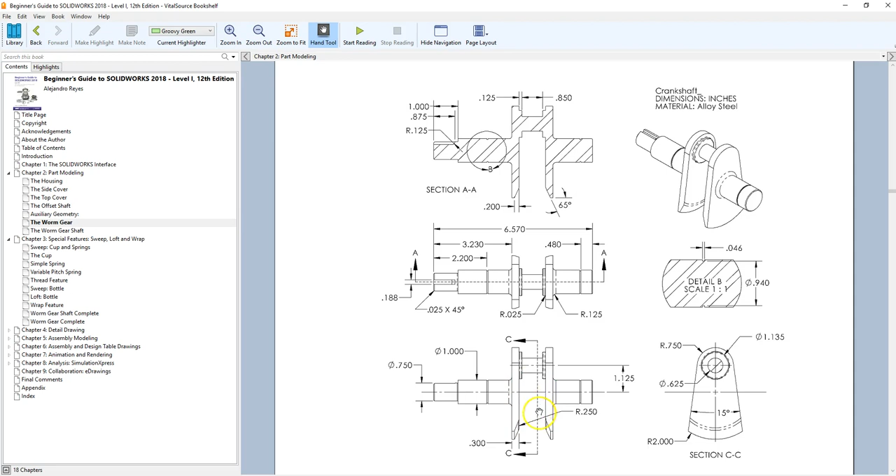So we're going to create an extruded boss, and I'm going to do it on the right plane. This is my origin, so this top part is actually going to be above it. I'll go ahead and line up a circle and put a dimension on it.

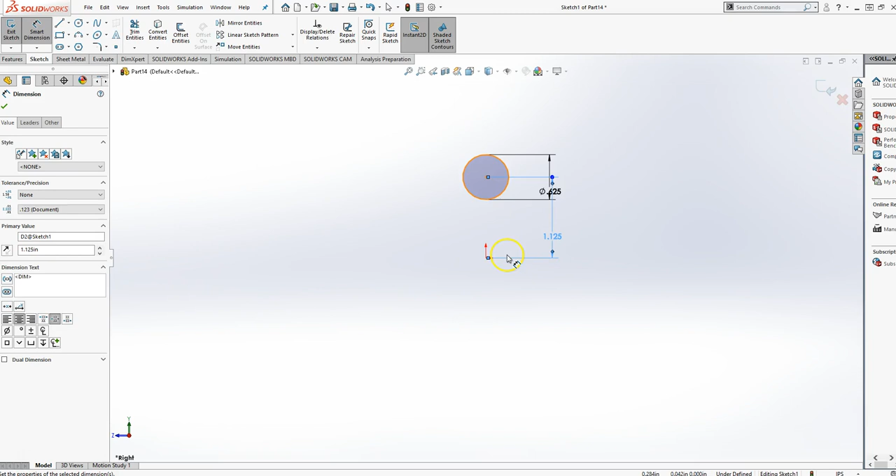The dimension for that circle is going to be 0.625, and the position of that circle is going to be 1.125 above the origin. I'll hit escape, and make sure these two points are locked vertically, so that locks it in place. Alright, there's that. I'm going to finish it.

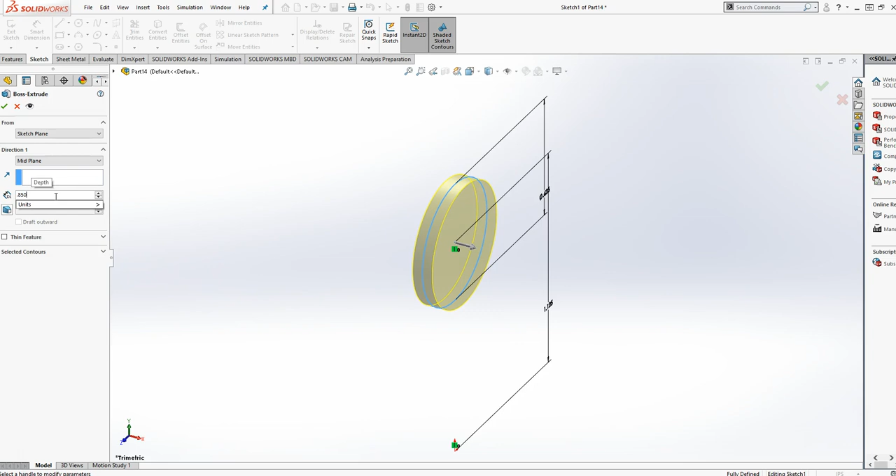Now the trick is I'm going to do a mid-plane extrusion, and that distance is 0.850, and we're finished with that.

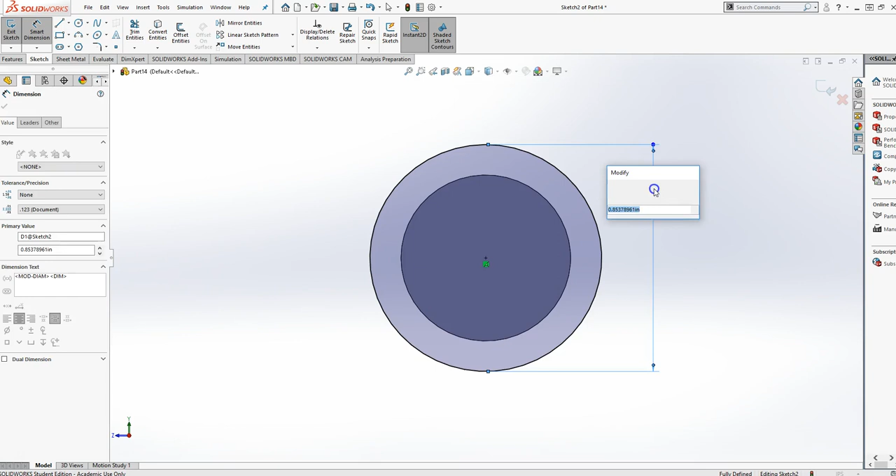Now I'm going to do another extrude boss on this side. I'm going to use another circle. The diameter of that circle is going to be 1.135. Enter. That's good. Finish. I'm going to check my extrusion here, and it's going to be blind, only 0.125, and that's that collar.

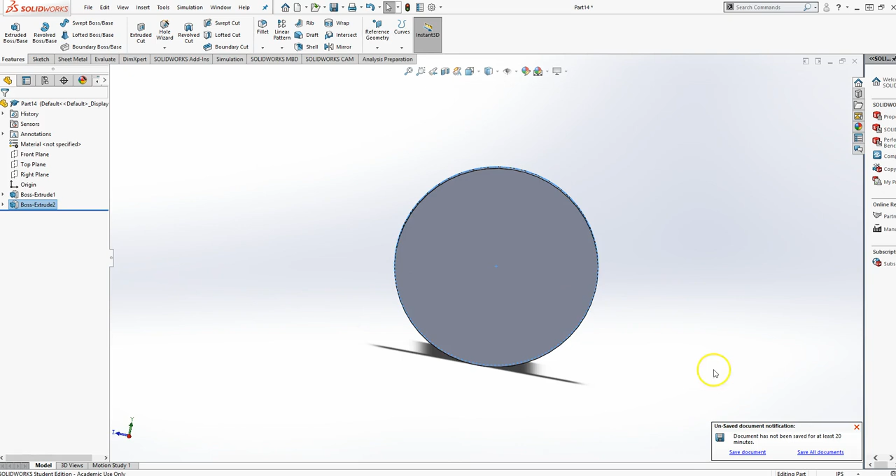Now, for lack of a better term, the bell part of it - I'm going to do an extrusion on this surface. Now, if you notice, let me pull this back over here - leaders point to circles; they point to the origin or the center point of the circle. So if you follow like 625 in, not only does it point to the actual circle, but if you follow that arrow in, it would point to the center.

So we're going to do this bell shape here. I know I need a 0.750 radius for this outside circle, but this radius, that 2 radius - if you follow that leader, you'll notice this is the center for that, not here. I've seen some of you guys mess up and try to center both of them on here, and that's not going to work out for you.

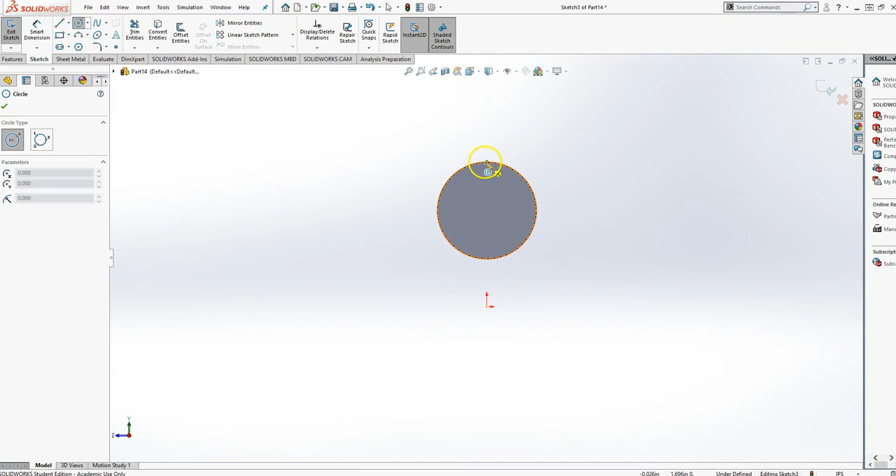So at this point, the way I lined it up is actually off the origin. Let's move this back over here, and let's get those two circles drawn. My first circle is here. My second circle is going to be from there.

Now let's go ahead and put a dimension on this. Since the radius is 2, diameter is 4. On this one, it's a 0.750 radius, 750 times 2 to get the diameter, and there's that.

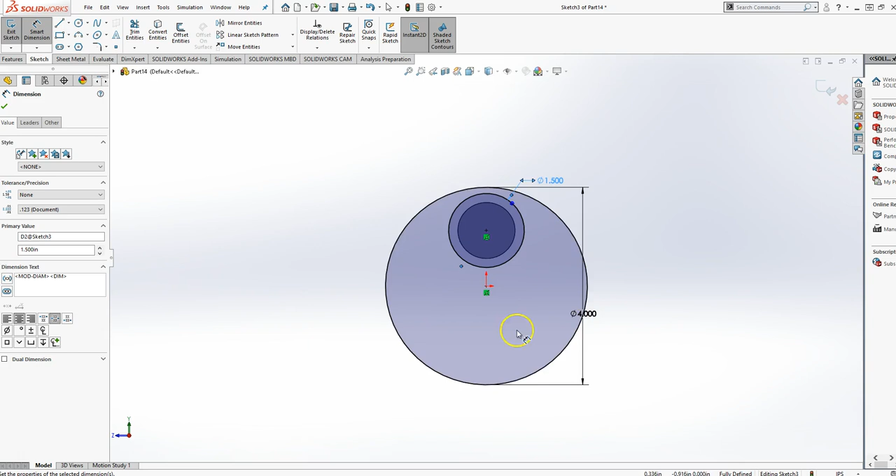Now, similar to the connecting rod - this bell is based off of an angle of 15 degrees. So I'm going to follow the same system that I did for the connecting rod, and I'm going to snap to this circle and then to the lower circle.

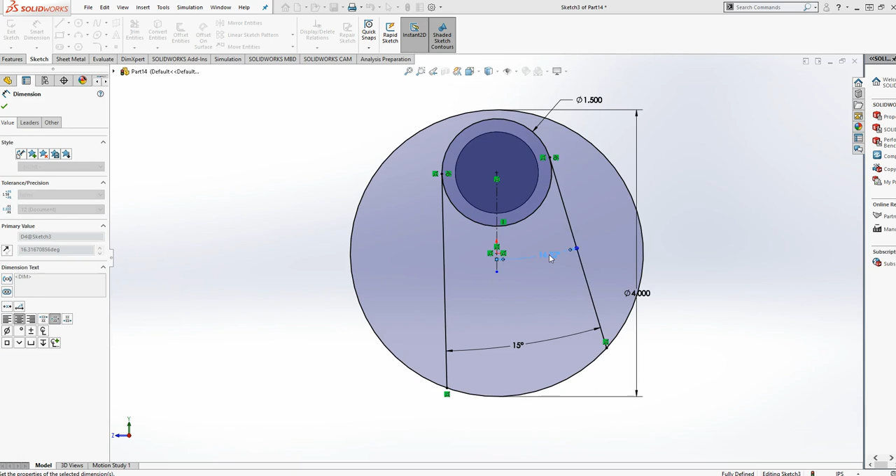Now notice that I should have tangent constraints. If I don't, then I need to select these two things and make them tangent, with coincidence down here and here. Now I'm going to dimension from this line to this line, which is going to be 15 degrees. I'll give myself a center line straight down, and then go 7.5 degrees, or 15 divided by 2 for the mathematically challenged. And there we go.

Now, I need to trim, and I'll get rid of this part, and I don't need the lower part here. So there is that bell housing thing. All right, so we're good with it. It's fully constrained. Everything's good.

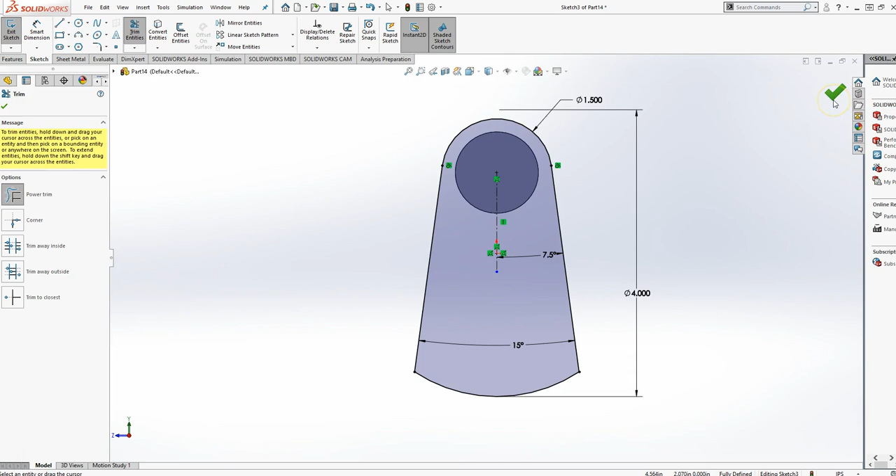So I'm going to finish that, finish my sketch. And the distance that I need to extrude this is going to be 0.3 thick. Now, I've got this part of it completed.

Now, the next thing I need to do is go ahead and get that chamfer here. So let's go ahead and knock that chamfer out. That chamfer says that it's got 0.2 for the distance, here, I'll point it out, and 65 degrees.

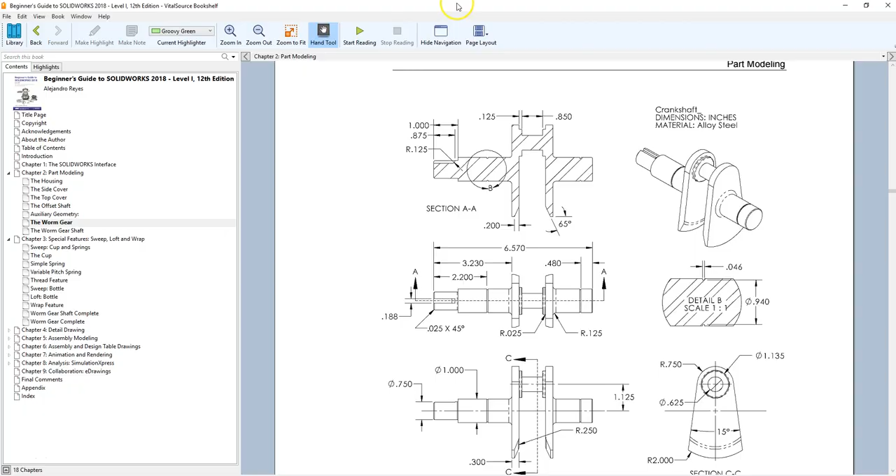And what's going to happen is we're going to end up having to flip this, okay? And I'll show you that here in just a second. So I'm going to go here under fillet. I'm going to say chamfer. And the distance is 0.2 and the degrees are 65.

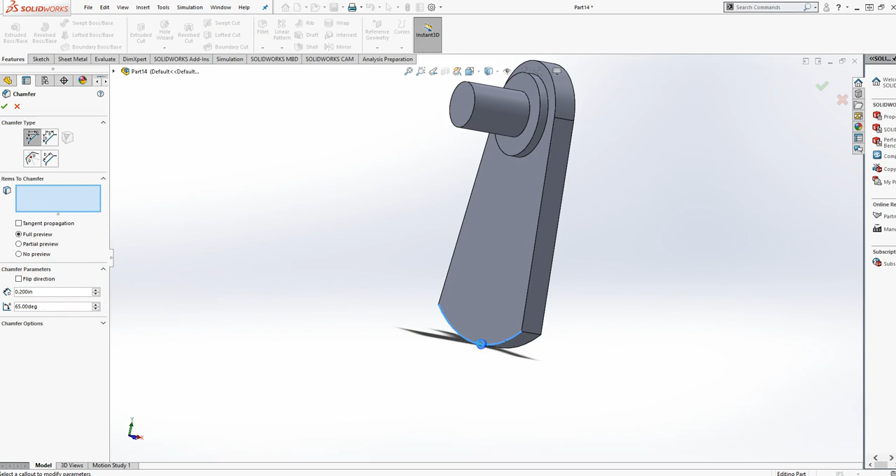Now, I'm going to take off this tangent propagation, and I'm going to pick this inside corner right here. Now, if you notice, it doesn't look right, okay? That's because it's applied the 65 degrees this way. So I'm going to say flip direction, okay? And now my 65 degrees is applied here, all right?

And there it is. And so I will go ahead and say okay. And there is that nice chamfer. So we've got that.

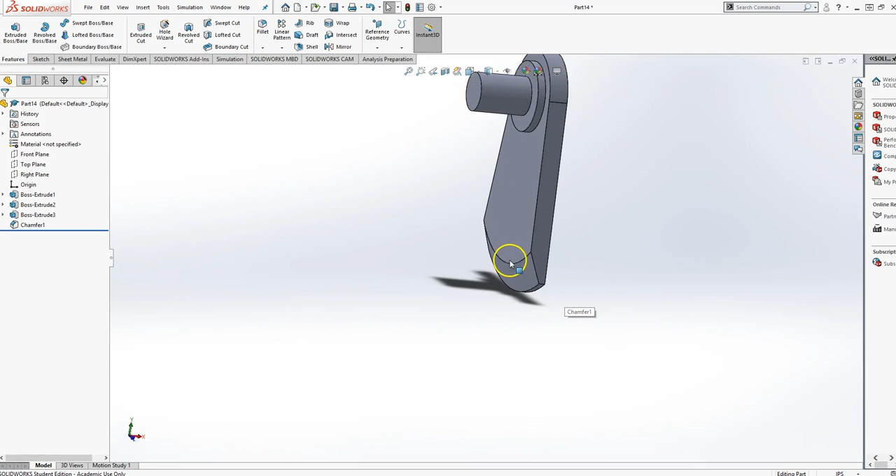And remember, we did a mid-plane extrusion here, correct? So I'm going to go ahead and say, all right, well, it's time to mirror. So I'm going to find mirror. My mirror plane is selected, and I'm going to use my right plane. And because my right plane is right in the middle, right there, okay?

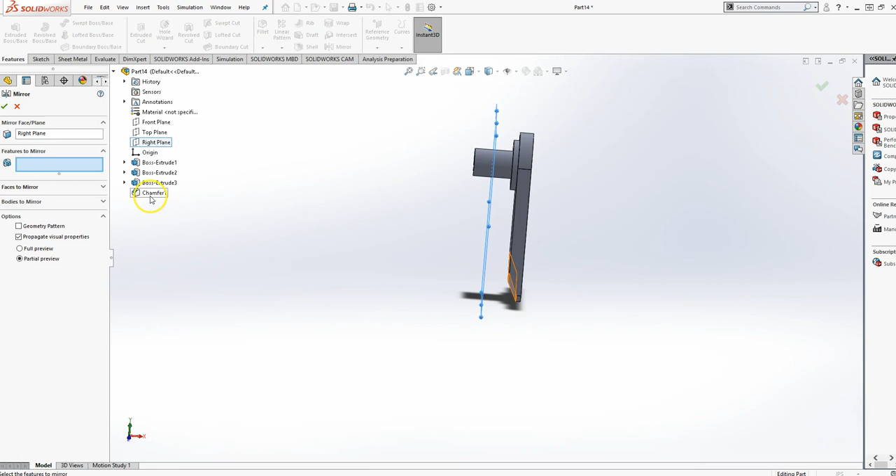Features to mirror. Now, I could go through here and click, click, click, click, and all this other stuff, but the easiest way is to go ahead and pick the features out of your tree. I'm going to hold control so I can select multiples, and I'm going to pick just the ones I need, which are these three, okay? And there they are there, so I'm going to say okay.

And we've got it now up to that point. So that's that part of it. The next part we're going to work with is, let's go ahead and put that little fillet on there. I should have done that beforehand, but oh well. I'll knock them both out.

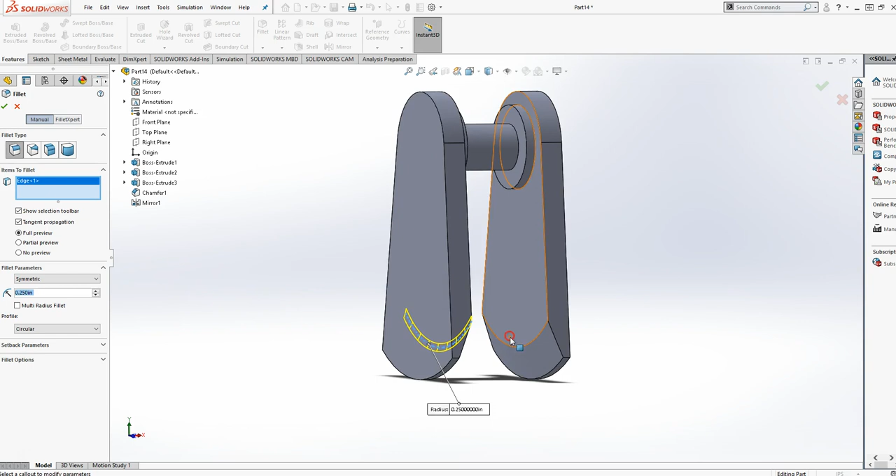There's a 0.25 fillet right on this edge here and here. You can't leave that out. So let's say fillet 0.250, and it's going to be, I'll move it around so you can see, it's going to be on this edge, and it's going to be on that edge, like that. And hit enter. And so let's go ahead and knock that out of the way so I don't forget it later.

Okay. Now the next part, let's see, control 1, is I'm going to do a revolve boss, and I'm going to pick the front plane. Okay. That's what I'm going to do it on.

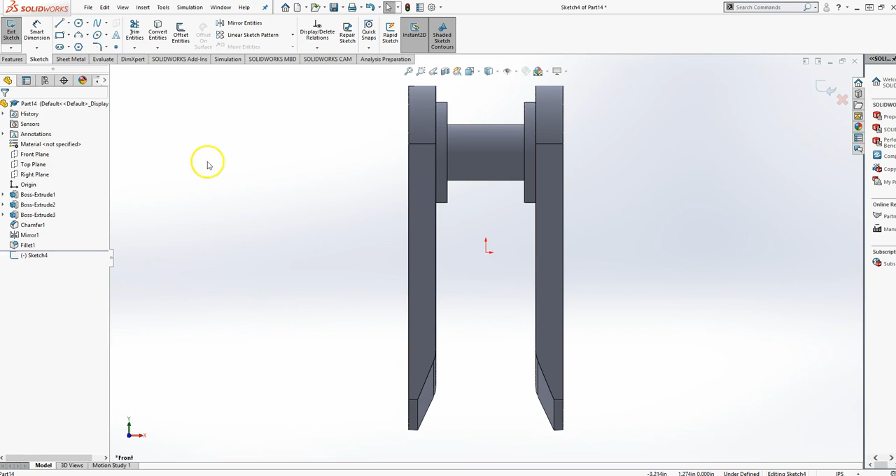Now, first thing I'm going to do is take a center line. I'm going to line up with this, and I'm going to do coincident with this edge straight through the origin, and coincident with this edge, like that. And it should be locked in place. Now that's my center line of rotation, my axis of rotation that I'm going to use.

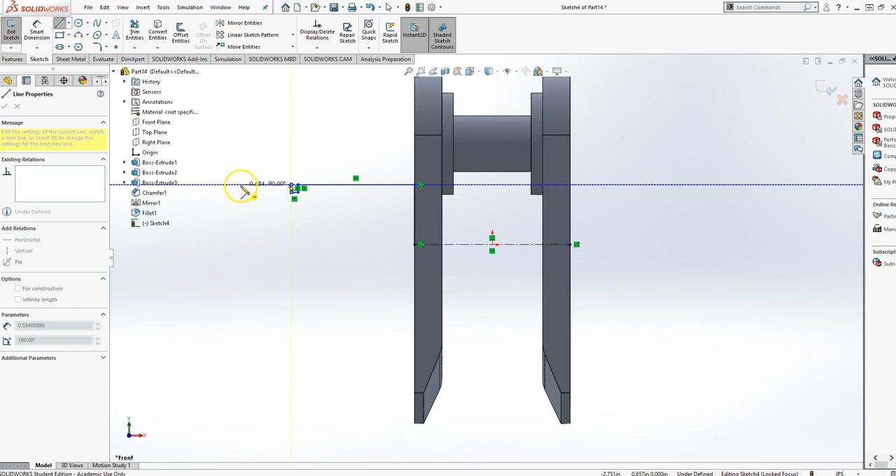So now I'm going to use a standard line tool. I'm going to start from that, and I'm going to build the shape of half of what I'm going to revolve. And it doesn't have to be perfect. I'll snap the dimensions in, and then I'm going to come straight back in like this. Okay, so there's that half of it.

And see, I'm doing it this way so I don't have to cut the middle out. And then I'm going to go here, and I'm going to mimic this piece out here like so.

Now, before I really get started, I know that this piece, this piece, this piece, and this piece share the same diameter. And so I'm going to do myself a favor, and I'm going to go ahead and select all 4 of those lines, and I'm going to make them collinear so they're along the same line. So if I dimension one, they all change.

Okay, and I'm going to do the same thing with these 2 lines here, this one and this one. I'll make those collinear because I know that's the same size groove. Okay, it's just something to help me out here later. So let's go ahead and get some dimensions on this. I'm going to get my horizontal dimensions first.

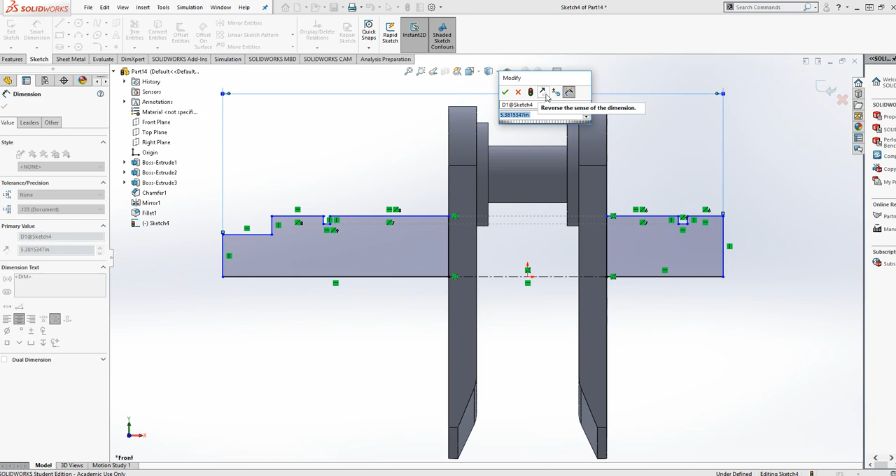So I'm going to dimension from here to here, and that distance is going to be 6.570. All right, 570 thousandths. From here to here is 3.230. And if it moved it in here a little bit there, I'm not too worried about. I'll just hold control and grab these lines and move them that way, just to kind of clean them up.

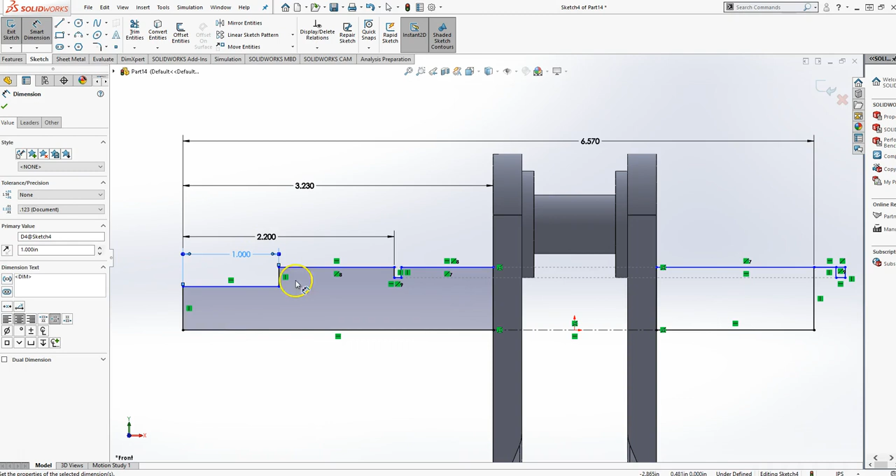The distance from this point to this point is 2.2. Okay. The distance from here to here is 1. So there's that. Over here, again, that got shifted around, so click, click, click, pull. There we go. Let's kind of get that sorted out.

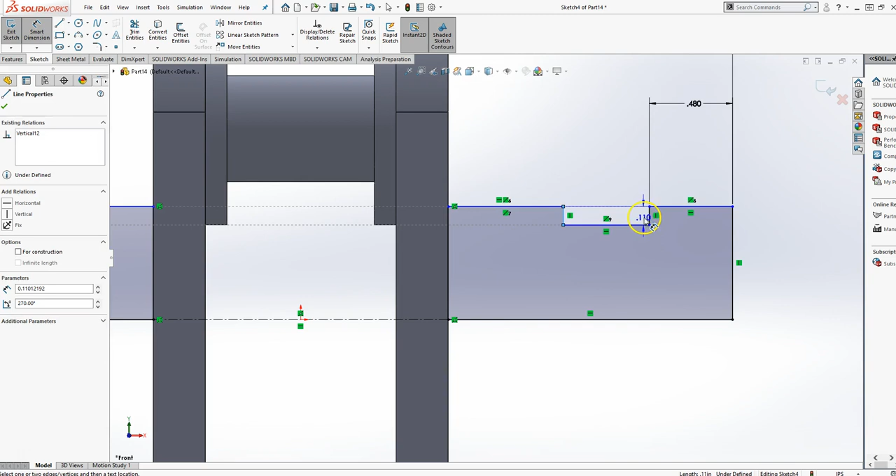Now, let me see if I got all those dimensions. I don't. Now I need to dimension from here to here, and that's 0.480. All right. And this distance here to here, that's the detail of that groove. So from here to here is 0.046. All right. Same thing here, 0.046.

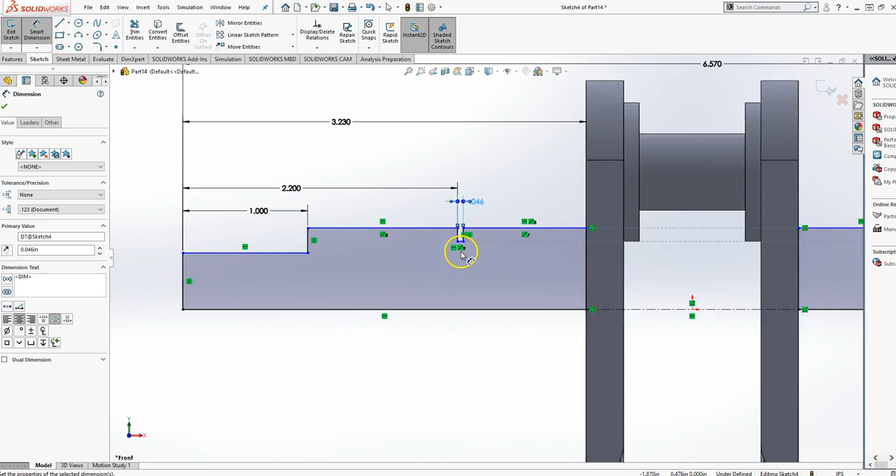All right. Now let's put our depths in. If you notice, almost everything is constrained now as far as the horizontal dimensions go. So now let's go ahead and dimension, and let's get this height here. Again, if we want to be lazy, I can dimension from here. Now I have to hit a center line. So let me get back here. Here we go. Here to here. If I hit a center line, then it'll let me do a diametric, and that is 0.750.

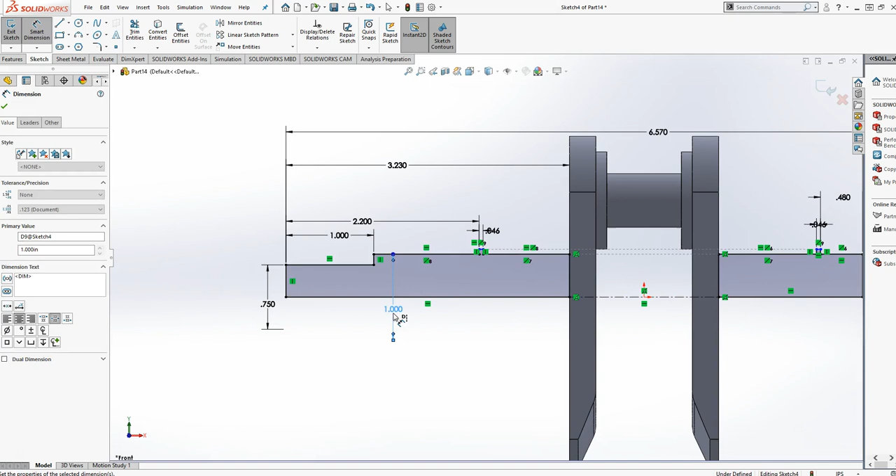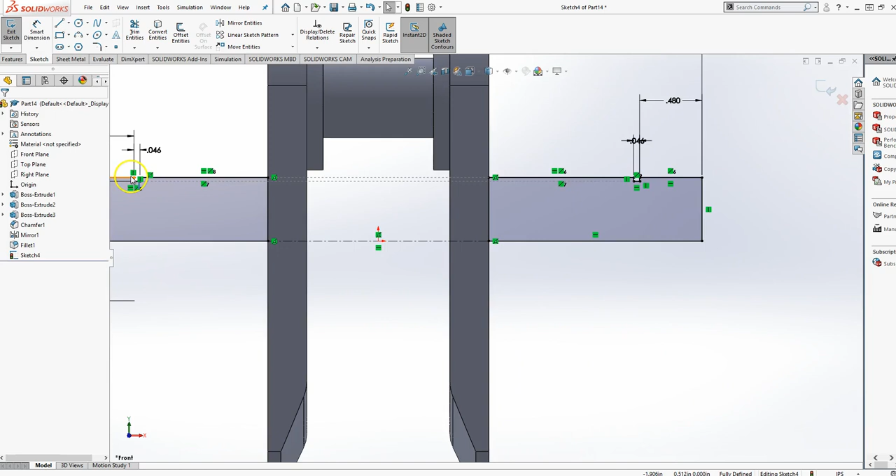From here, and see, it automatically starts feeding it to me that way. It's a 1-inch diameter. Now the cool part is, since I had everything constrained, all that stuff will move. And now for this one to here is going to be 0.940, and that drops that in. So everything should be fully constrained. You see how, because I made these collinear, it kind of dimensioned this side too for me. All right, so we're good there.

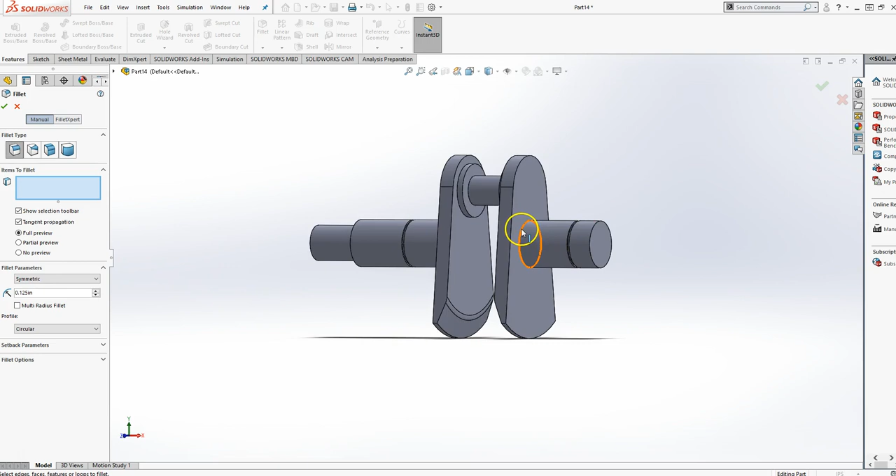Finish that. It automatically picks my axis for me because it was fairly intuitive, and say OK. And so there's that part of the crankshaft. Now let's go ahead and fill it out with everything else that's necessary. I've got a radius of 0.125, so I'm going to say fillet 0.125, enter, and it goes on this side, and this side is the only place I think that fillet goes. I'm going to say yes.

Enter. Up here on the top of this shaft should be some kind of chamfer. Nope, it's a fillet of 0.025. So I'm going to go fillet again, 0.025, enter, and it goes, looks like in two places. Should go here and here, and here and here. Okay, so there's those. What else are we looking at here?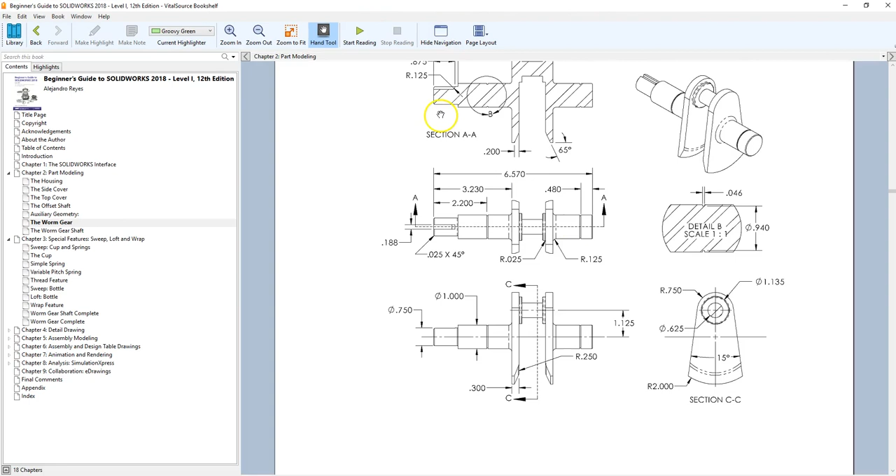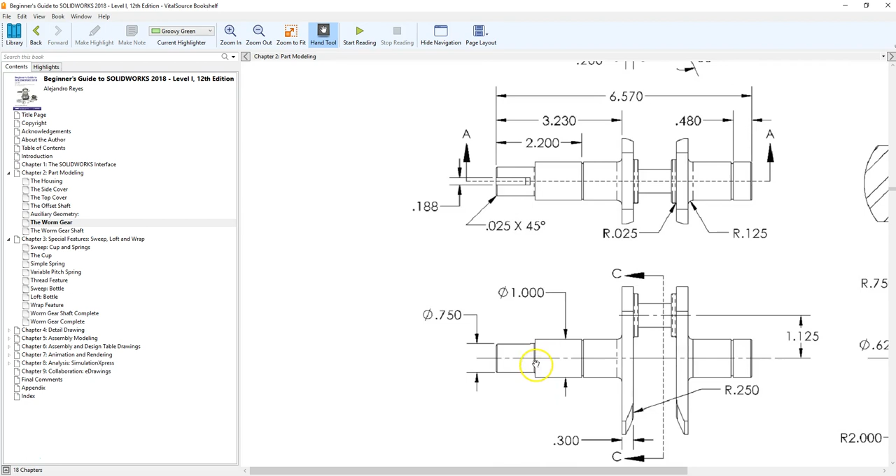So I'll show you what I'm looking at here. If you notice, I have to do this manually on this. You can see that there's either a fillet or a chamfer on this end. Oh, here we go. There they are. So it's 0.025 by 45 degrees here and here. What you don't see is this right here. You see that hidden line? That denotes a fillet, if I'm not mistaken. So there's going to be a fillet here.

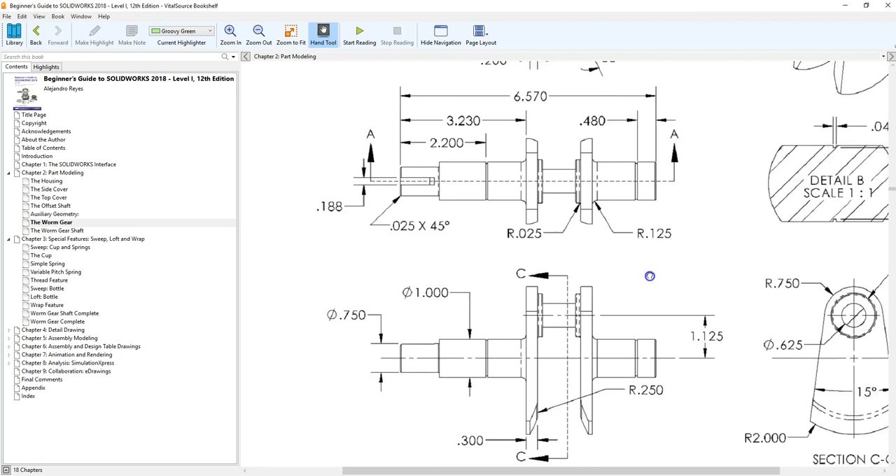And I'm assuming, which will get you in a lot of trouble sometimes, that's going to be a 0.025 fillet. So we're probably going to have to go with that. All right, so we got a 0.025 by 45 chamfer here, and we're going to do a 0.025 fillet on this right here. So let's go ahead and knock out the fillets since we're already in fillets. So another fillet, actually, you know what? I'm not going to make another feature just for that.

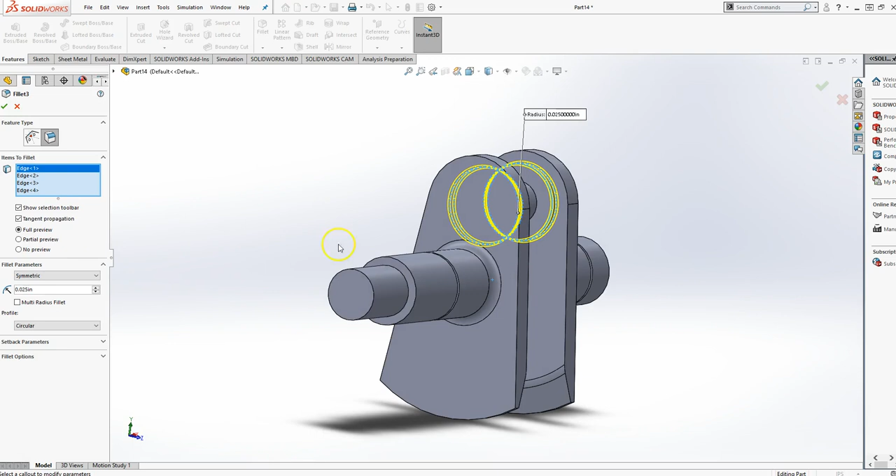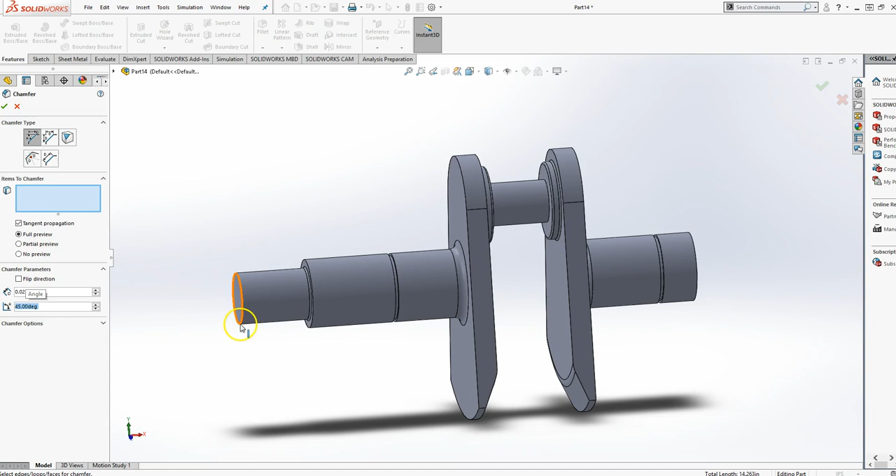So I'm going to click this, I'm going to edit the feature, and I'm going to add that fillet to there, okay? And say okay, and it adds it. And now we're going to do a chamfer, and it is a 0.025 by 45 degrees, and it's on this end and this end, like that.

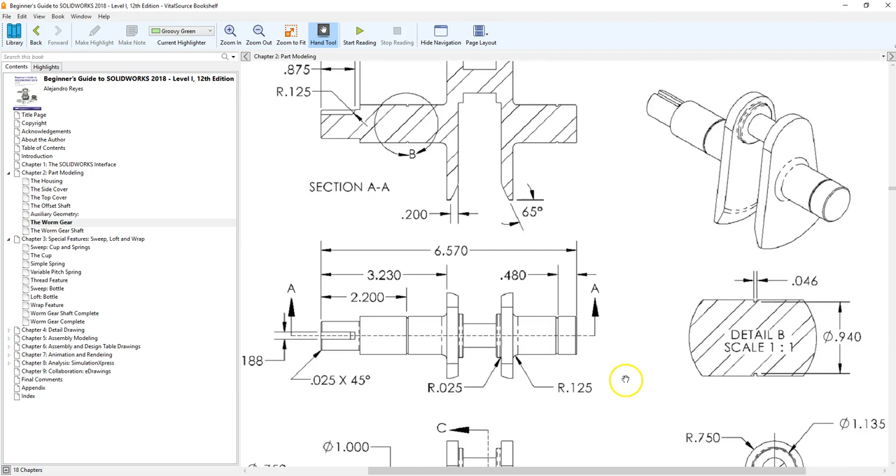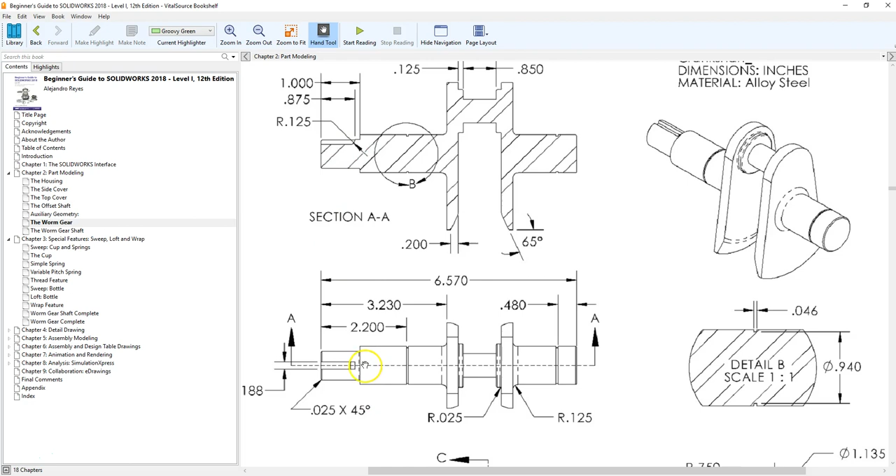All right, so that should be it for as far as that goes. Now the next thing we need to do is work on this slot here, okay? If you pull up your drawing and look at that slot, they give you all the information you need. The slot goes back 0.875. The depth of that slot is denoted by the radius here of 0.125. So it's 0.125 deep, and it just comes off into a radius here. So 875, 125.

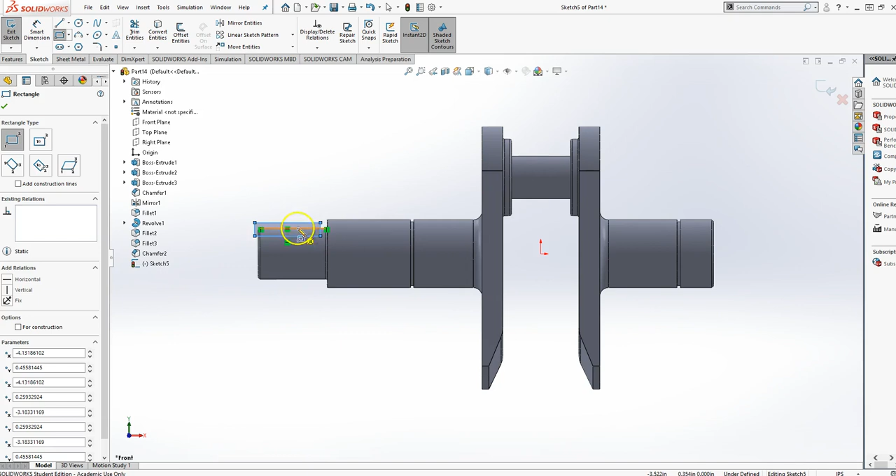So what I'm going to do is an extruded cut this time. And that cut is going to be based off of my front plane. And if you look, well, it didn't help much there. Control 1. We'll take a rectangle tool, and I'm just going to kind of draw in like this. Now we can look at it, and you can see it's right down the middle of this. So Control 1 to get this sorted back out.

I'm going to dimension from this line to the bottom edge here, 0.125. And from this point to here, the front, I'm going to dimension it as 0.875. Okay, so that pulls it that way. Honestly, this part here doesn't really matter that much, neither does this.

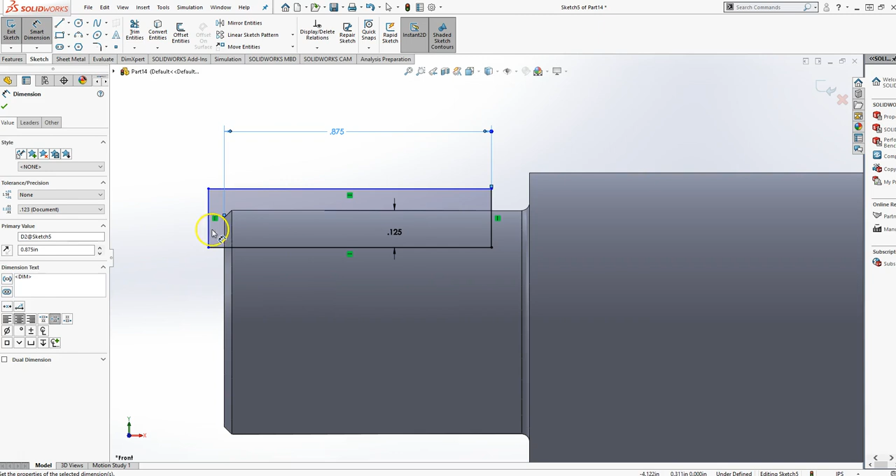If you want it to be a nice and clean drawing, I could easily take this line and grab a point like that and make them coincident, so that'll pull that down, and then grab this line and this point here, and make them coincident, so it kind of tucks it in, just to make it nice. Now I need to put my 125 radius here, so fillet, 0.125 radius, this corner.

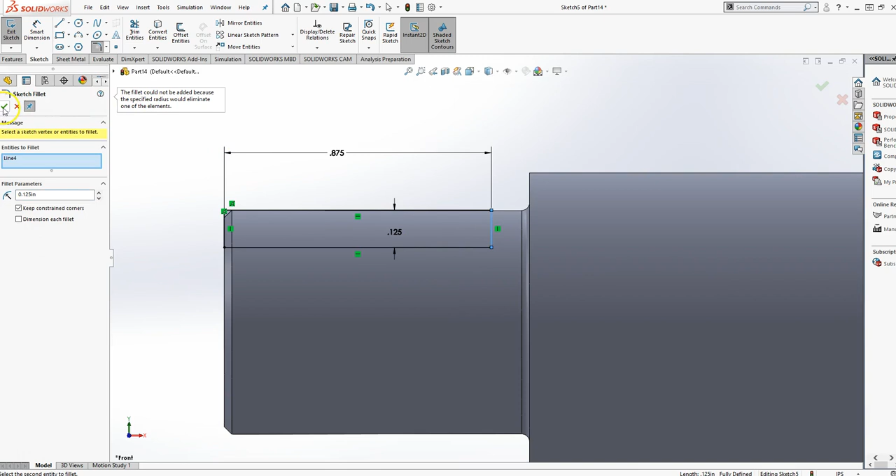Specified radius would eliminate one of the elements. Oh, and what element would that be? Let's see what I'm running into here. Probably just because of the way I put it together. Here to here, won't do it. Alright, so what I need to do is get rid of something. Probably these coincidences. So let's delete this, let's delete that, and let's see what happens now.

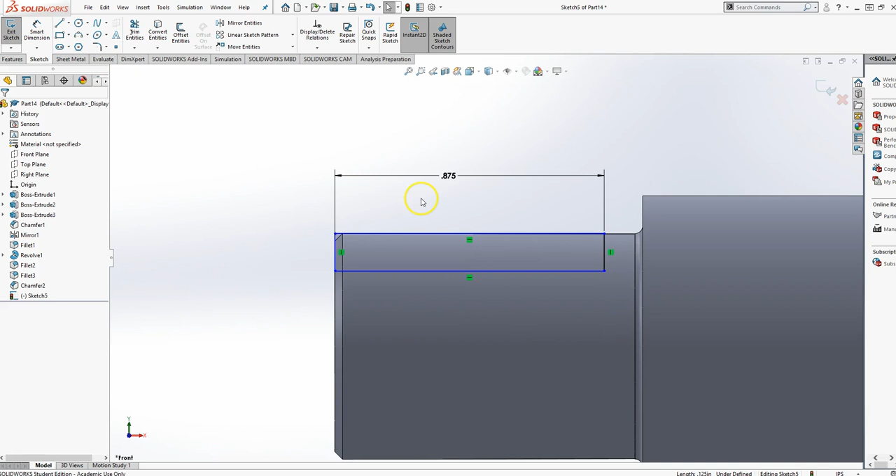Fillet. Well, that's not going to be good. Let's get rid of another. Let's get rid of this dimension here then. Let's see if that frees it up. I guess not. That's strange. Eliminate one of the elements. Yeah, okay. Let me back up here. Put all that stuff back.

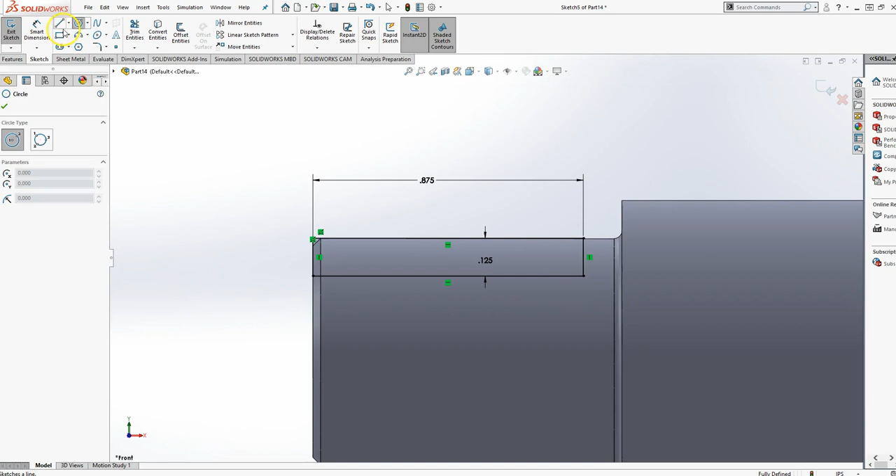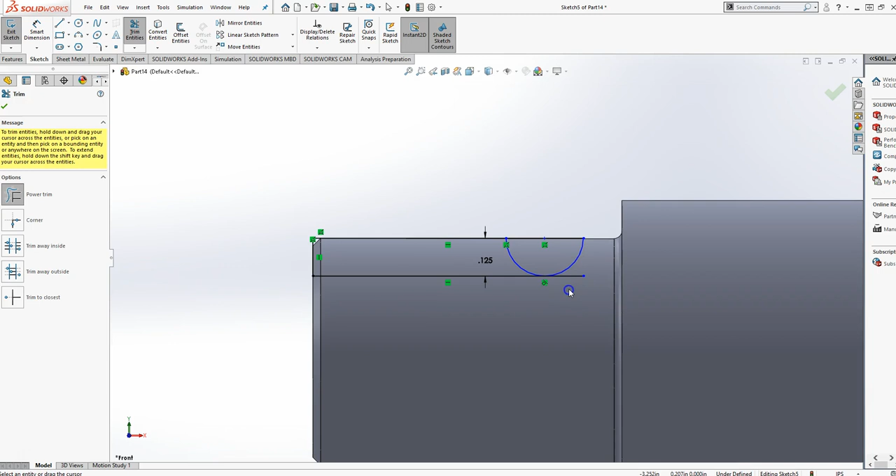I'm just going to cheat. We'll make a circle. Snap it to here. And then I'm going to dimension from here to here, 0.125, which is the radius. See how that works there. Trim, knock off the top here. Knock off that, knock off that, and knock that out.

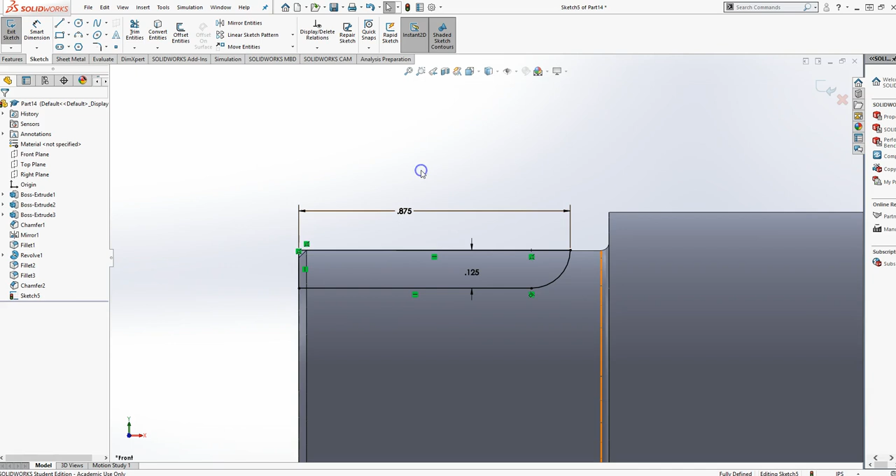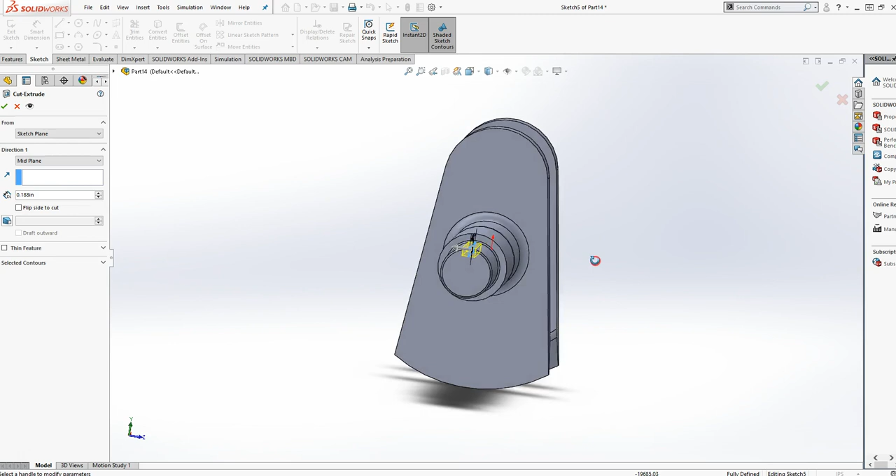There's my sketch. Now I'm going to go ahead and finish. It wants to extrude one way, but I need to do mid-plane because it's in the middle. And the thickness of that is 0.188. Okay. And I'm going to say okay. And if we look at it, it's nice and clean. Good cut. And there is that keyway.

I'm trying to see if there's anything else I've missed here. I really don't see anything that I might have missed. So we should be good. Yeah, we should be good. All right, so that is the crankshaft. So let's see, Control 1.

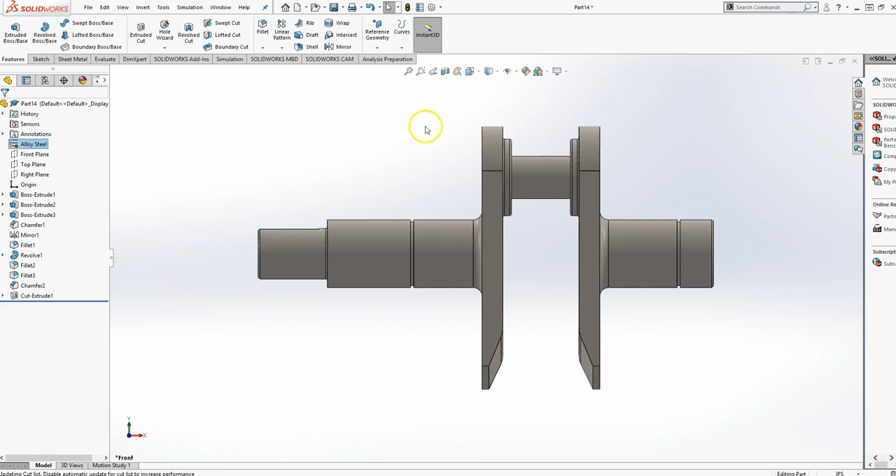And now, let's save it. Let's see, what's the material? Alloy steel. So material, right click. I should have alloy steel up here, maybe. That's cast alloy steel. That's not the same thing. So let's go edit material, steel, alloy steel, apply. So we're good there. Let's save it. So file, save as, and I'm going to call it crankshaft, and save it. And there it is.